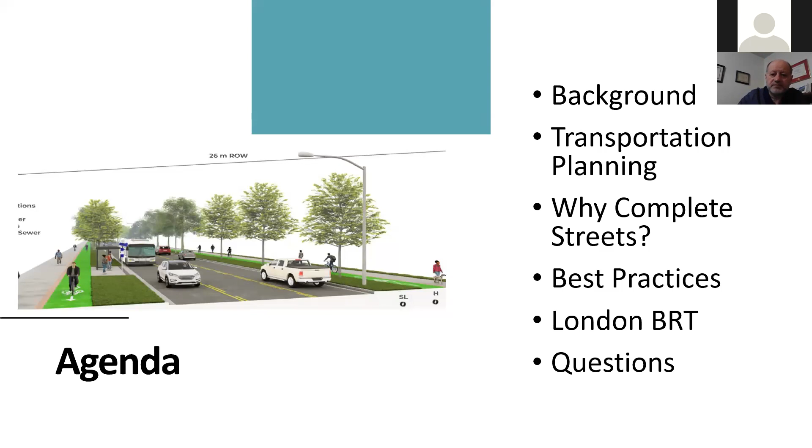I just want to tell you something. When I start my class in transportation at Western, I usually ask the students, what do you know about transportation? Do you know what transportation means? And for the public, or even for the students who are not familiar with the term transportation, some of them would say, well, transportation means transport trucks, for example. Or some will think transportation means public transit, take the bus. Even if you talk to someone on the street and tell them I'm a transportation engineer, the minute they hear transportation, they might think something different.

So transportation is more than a bus, and it's more than a truck, and transportation is really moving people and goods from one location to another. It's for all modes of transportation. It's not even just land transport. If you take a plane and you fly, that's transportation, but it's air transportation. And of course, the focus in a municipality for us is more on land transportation. It is essential for nation development and growth, and also for a strong economy. That's why you find big cities, strong cities, they have good transportation systems.

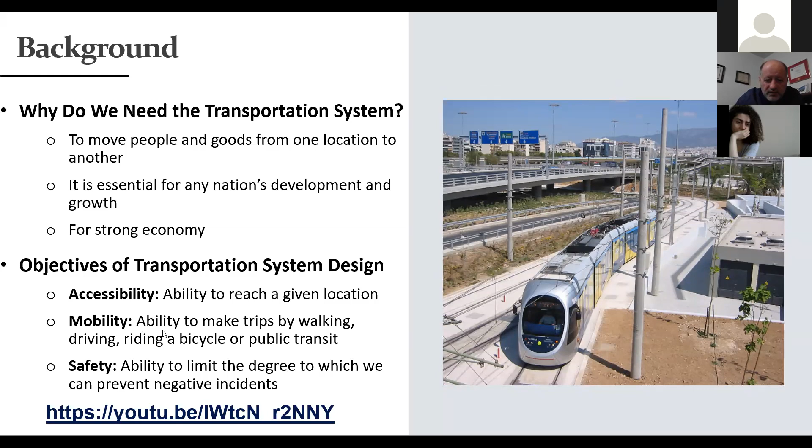I don't think we have time. If anyone is interested, can watch this YouTube. Maybe I can, let me see if I can, I just want to exit. I'm not sure why this yet. If I can copy paste it on the screen chat and people can just paste it and watch it later on. Just because it takes time and I'm not sure if this works in a Zoom setting.

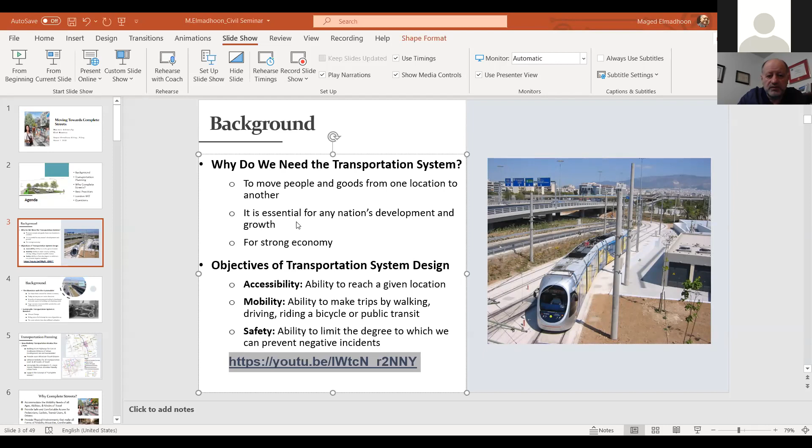It's a nice video that was done by the City of London. Okay, sorry for this. I'm not sure why this is not. It was done when the City of London was preparing the... Okay, so I'll leave it for anyone that is interested. You can watch the video at your own time. It gives you more information about mobility and transportation system and how it works.

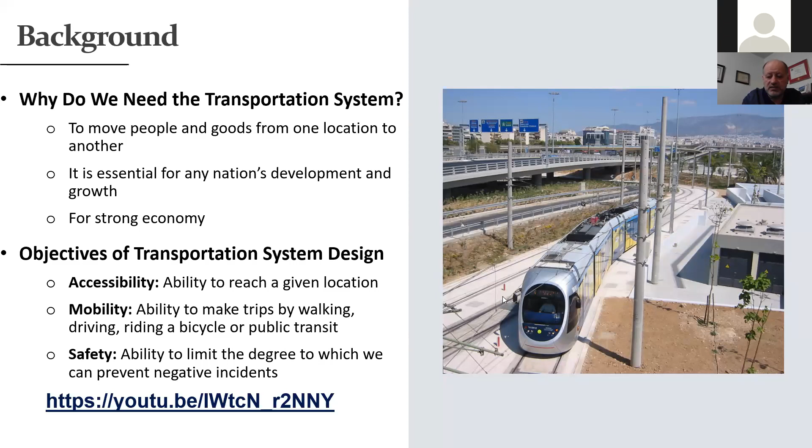For many years, and this is kind of an introduction to the complete streets and how we got there, we liked our cars for almost a century, right? And everyone, I drive my car, I go to work using my car, I go shopping using my car, and there is nothing wrong with that because it's very convenient, it's easy, you just leave your home and you ride your car and you go anywhere you want.

And even in the last 100 years, for most governments, the funding for transportation was in relation to building roads and maintaining roads for cars, not necessarily maintaining roads for transit or for cycling. It's more for cars. And then also you can find all types of automobiles and all types of manufacturers and brands, and you buy the car you want. And it's also relatively not expensive, at least to date.

But then at one point, the governments realized that this is not sustainable and that we need to think of a sustainable transportation system for many reasons. One, because of climate change. We all hear about climate change, of course. And then rising prices of oil, which is driving the cost of gasoline even up. We can see that now. At any instant there is a war or some conflicts in the world, gas prices go up. And also the auto industry has suffered some setbacks in the last few years for different reasons.

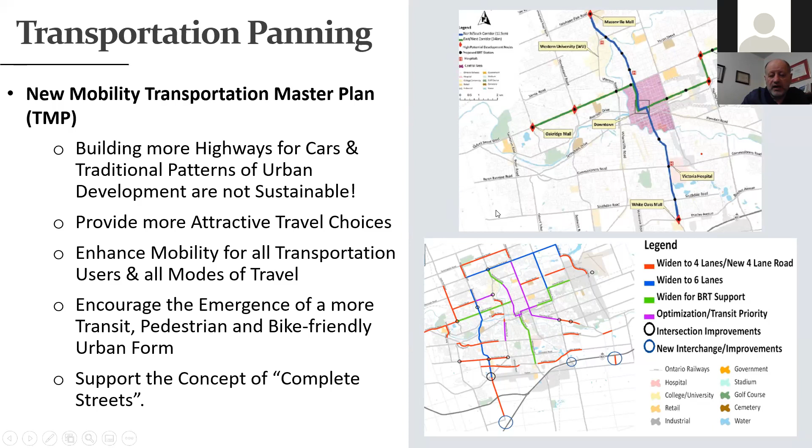Because, let's say 20 years ago, 30 years ago, most municipalities were thinking more about just how they build roads. Maybe sometimes you have sidewalks, but not thinking about cycling, and also how you can make other modes of transportation attractive.

Just to give you a sense of what I mean by that, these are some of the best practices before and after. And I have to tell you that this is just a very small component of complete streets. It's not everything. Because complete streets, although it's been around for maybe 10 years, 15 years, is still considered the new approach in designing transportation systems. And you don't find a lot of examples of really fully complete street roads that have been implemented yet.

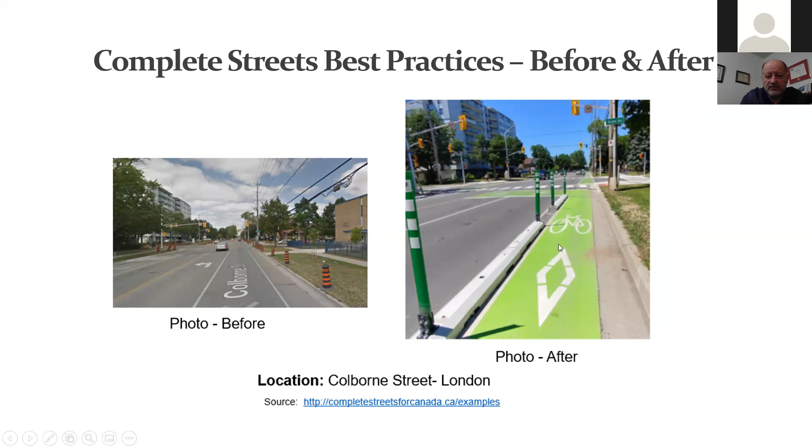So what do you need to know? We couldn't do complete streets for a municipality just by making guidelines from nothing. You have to have some policies to support it. So planning policies in any municipality, this is general. I mean, this is related to the City of London, but it's general to any other city. For London, for example, you have the municipal official plan, which is the London Plan, and the transportation master plan. These are the planning policies that support the guideline.

Then you have the planning studies, like the cycling master plan, rapid transit, which was also called Shift during the EA process. And then the design guidelines, for example, we are talking about the complete streets design manual here.

So what are complete streets? For London, when they did it, and I will explain what these typologies mean, they had 8 street classifications or typologies in the manual. The London Plan identified design features that should be included in each typology. So you have 8 different street classifications or typologies, and the official plan of the City of London determined what features each road would have. And then the CSDM provided a cross-section for each street typology and an illustration of how those different elements can fit together.

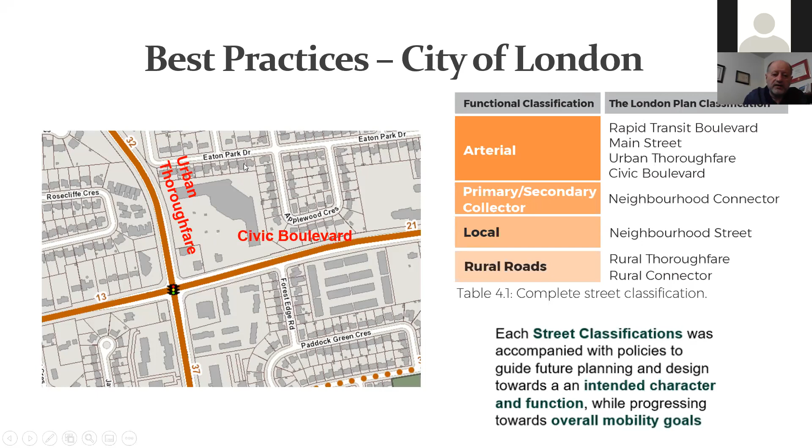Because when you drive on Wonderland, you can see that's a very busy road, has high traffic volume. It's linking South London with North London. It's linking Highway 401 all the way to the south and to the north. And it's a very commercial corridor, whereas if you go to Commissioner's Road, it's less traffic, still a good amount of traffic. It's mostly residential. It's still linking to the east and to the west, but really not as Wonderland is doing. And that's why it is different. We call this Urban Thoroughfare and we call Commissioner's Civic Boulevard.

To give you some idea here, I did not really include all the typologies because I just didn't want to take long. I'm just giving you a few examples of how we are transitioning from just a normal cross section that is dealing only with cars into something that is more complete and conforms to the complete street approach.

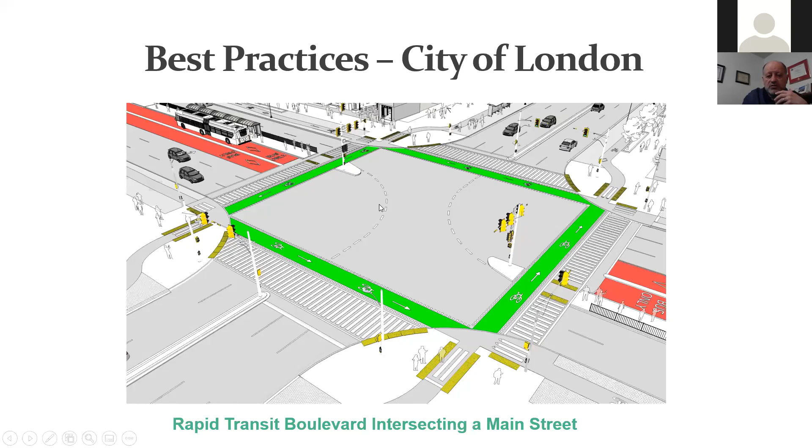This is a typical cross section between a rapid transit corridor and the main street. And this is where the buses will be in the middle. And you can see again how we are trying to accommodate all modes of transportation, making it easy for cyclists to cross, same thing for pedestrians. At the same time, it's also for the bus rapid transit.

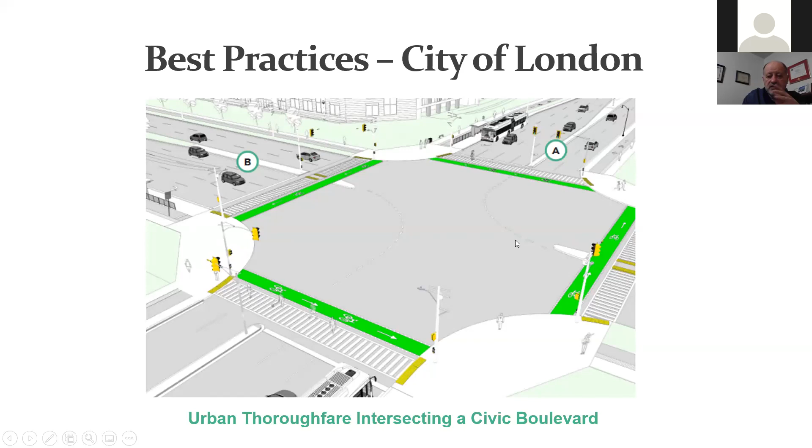Another one, this is urban thoroughfare with Civic Boulevard. And again, this is just an example of how, even at the corners here, you have a wider area for people to stand, and also very safe. You have crosswalks and crossrides for transportation users to use.

In 2019, the City of London won the Transportation Planning Project of the Year award by the Ontario Traffic Council for this complete street study. So that's it. This is an example of a best practice from London.

I'm going now to go to the Niagara region, where they have something similar. Of course, most of the other Ontario municipalities, in Canada and in the States, have developed complete streets as well. But then again, they have to be based on official plans. So in Niagara, the Transportation Master Plan was approved in 2017. It is a 25-year plan and provides a strategic vision for transportation in Niagara. It recommended complete streets to be a vision and direction for a changing region. They have a strategic cycling network, transit strategy, and road network strategy. All this came from the Transportation Master Plan.

Now, the Niagara region, which extends all the way from just the edges of Hamilton to Niagara Falls and to the south, has a different road system than, for example, the City of London. The City of London is a one-tier government. It's just a city hall municipality, whereas Niagara is really a two-tier government. So Niagara region, two-tier government: it's the Niagara region and the local municipalities. And it's comprised of 12 local municipalities.

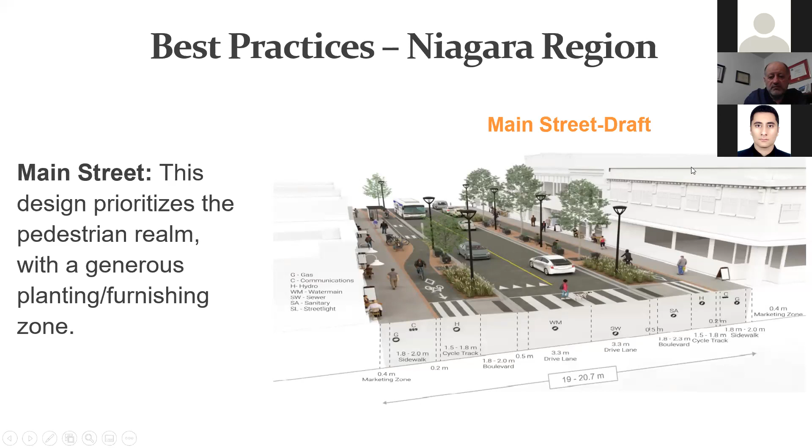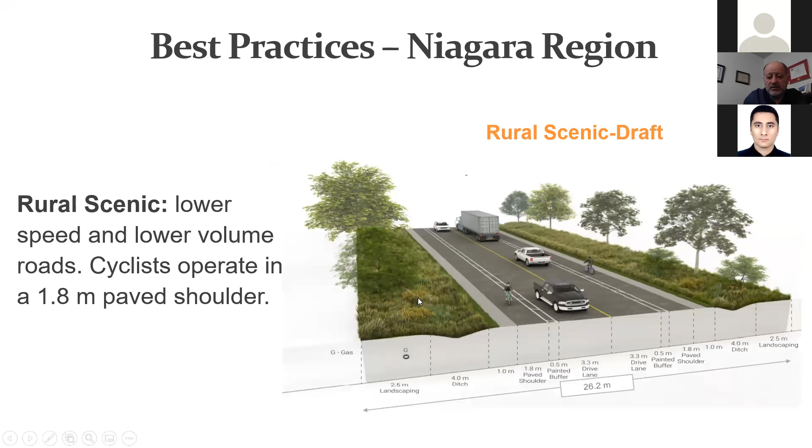There's also an audit tool that has been developed in order to determine the priority when we implement. Something I did not talk about is the right-of-way. Right-of-way is not always available, because the municipality or the region can build a road, but they cannot encroach onto private property unless they purchase it, and sometimes this is very expensive. So they have to work within the limit of their right-of-way. For example, this one is about 30 meters. Sometimes you don't even have the 30 meters; maybe you have a right-of-way of 25 meters.

What do you do in this case? What should you eliminate? This tool gives you some direction, based on priority, on which element we can remove. For example, maybe we can remove the center lane, or reduce the cycle track or remove it, if we say cycling on this route is not important. Again, it's still in draft, but this gives some direction on how you can prioritize and think of the best way to do that. So that's it for the complete streets design manual.

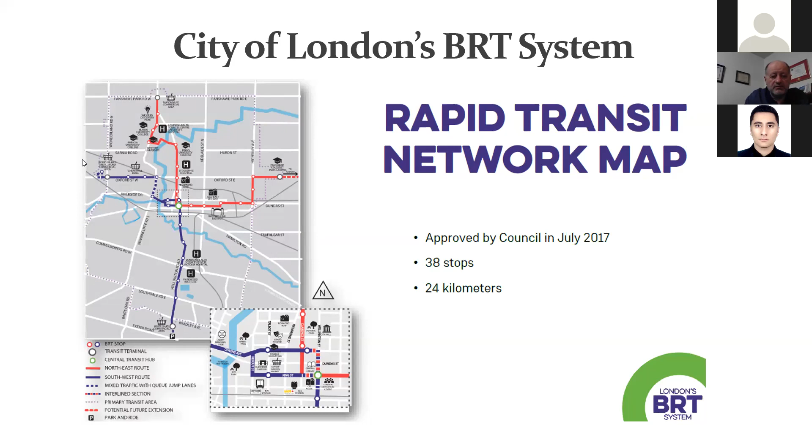The council at one point put a pause on the north leg, which goes through Western University, although it is the most important link, and also the west leg. And like any big project, it has to be funded by the government, by the federal and provincial governments. In this case, the federal government and the province have already agreed to fund this project. That said, as I said, right now the plan is to do the east leg and the south leg, but I heard that they will look back into this in order to make it complete.

So what does bus rapid transit mean? It means that you will have dedicated bus lanes, not the current system where buses are on the road. They will be separated. In this case, they will be in the middle, as you can see here. They have priority over traffic. They have good transit stations, heated, maybe washrooms, things like this. So this is the bus rapid transit.

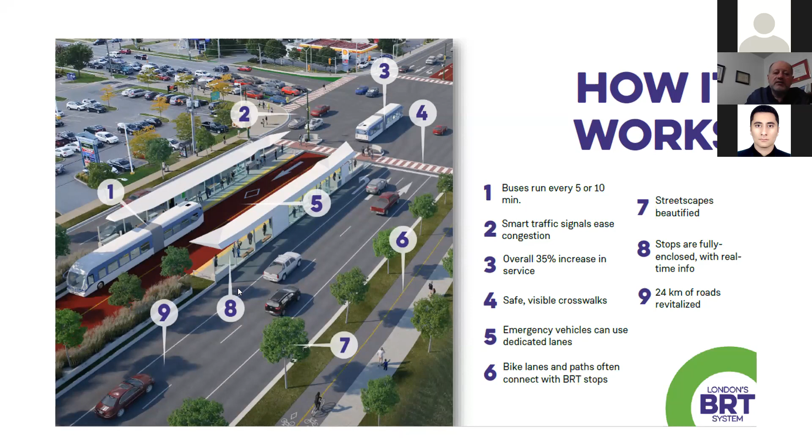I don't have to go through the numbers here. You can read it yourself, but you make a system that is reliable, that is fast, and that way you can encourage people to take the buses. I already talked about that. So this is just an explanation of each leg.

North leg, which, as I said, goes all the way from downtown to Masonville Mall, and it can go through Western University if Western agrees to that. And this is just a rendering, an example of Richmond Street at Oxford Street, how it would look. So that's the bus lanes in the middle. This is Richmond Street at Grosvenor Street, looking north again. And this is St. Joseph Hospital to the right of the screen.

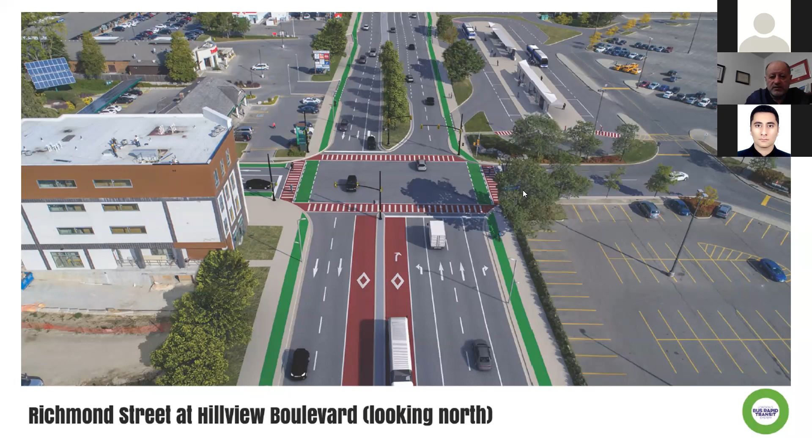Richmond Street at Hillview, that's near Masonville Mall. This is the parking for Masonville Mall, as you can see here. And then you have the east leg, which goes from downtown on Dundas, then Highbury, then back to Oxford. And you can see here where it says to the airport. So this is just a future leg into the airport. This is Oxford Street East at Fanshawe College, and you can see Fanshawe College here. That's kind of the end where the bus will loop and go back again.

And then the south leg, which goes mostly along Wellington Street all the way to White Oaks Mall. Wellington Road and Commissioner Road, again, just an example here, along Wellington looking north at downtown London. This is Clark's Bridge, Wellington Road. This is very clear. You can see traffic and you can see the middle lanes here. Wellington Road at White Oaks Mall. Again, there is a bus station here.

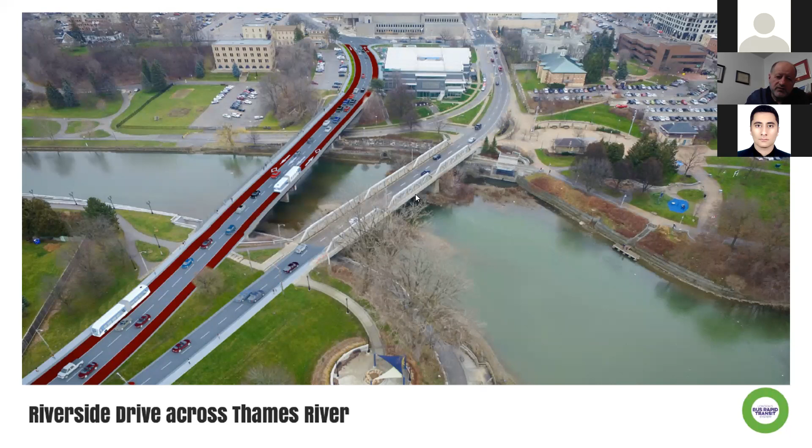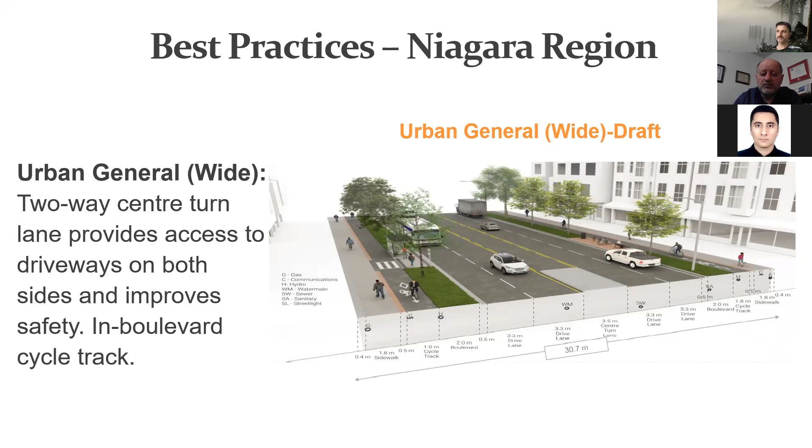So for safety, I do agree, medians are required. And that's why, let me go back to London, for example, just to show you the example. You can see that in the complete street, medians are shown even in the urban thoroughfare and the civic boulevard.

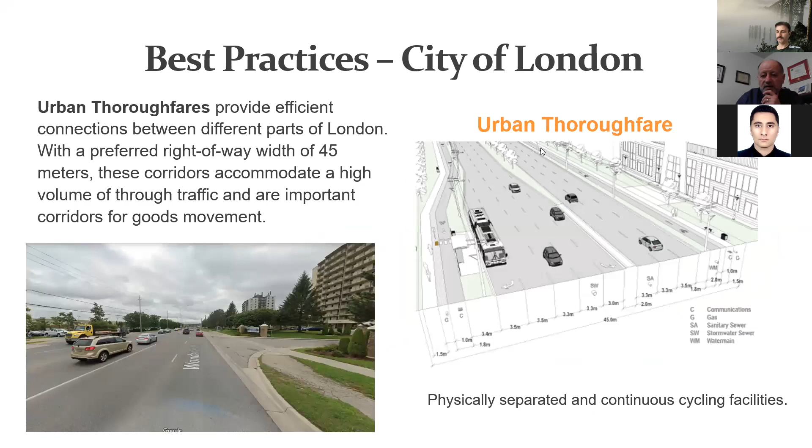We are showing a median here. And even Hyde Park, when it was widened a few years ago, a median was installed. So medians are safe because you prevent turning movements from happening, and you can do turning movements only at signalized intersections. However, based on existing conditions, you cannot just go and block accesses because a lot of driveways are

on the road, and they cannot make a U-turn, for example. And sometimes making the U-turn at signals is not necessarily safe. Sometimes you don't have wide lanes, and it's hard to block access to existing driveways. In the future, every time there is a new project, reconstruction or anything, a median is one of the things that is taken into consideration to be installed.

Thank you. Thank you. Thank you very much.

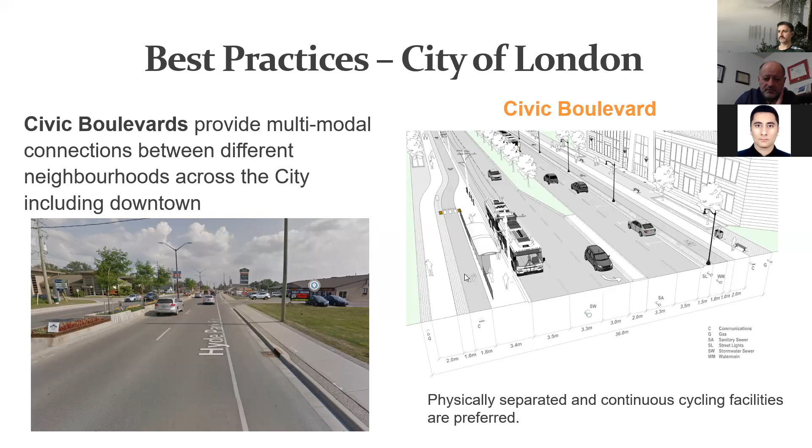Question from Evan. With the rapid transit model for the buses, are we not making it more difficult for pedestrians to access the bus stops if they are positioned in the center of the road, hence making pedestrians cross the road even if the bus is traveling the same direction as the pedestrian is standing?

So this is, again, all part of the complete street approach that I mentioned. Complete streets is about accommodating all modes of transportation, whether it's people walking, crossing, or buses or anything. And this pedestrian crosswalk and the refuge island in the middle, you can see, provide an area for people to wait.

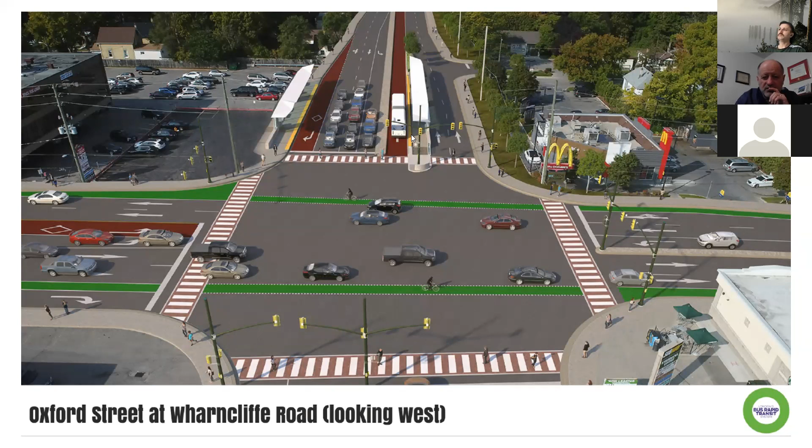So it's not necessarily making it difficult, because they would cross to the middle lane. Let me see a good example here. So you have the bus here, so they can cross and just go to the bus stop. There isn't anything difficult as long as it is designed safely with traffic signals and everything. It should be fine. There is no difference between this and any other existing situation.

Okay, excellent. Thank you very much. Welcome. All right, one last question from Zihan. Yeah, thank you, sir. Thank you for your presentation.

Well, I have a few years of working experience in China, and now I'm doing a master's degree at Western. As you know, there are no transportation courses here. So my question is, where can I learn more about transportation in Canada? Because I think the regulations and the working process are different in China and Canada, and I want to work here in the future. So could you recommend some resources or books that I can learn more about these things from? Thank you.